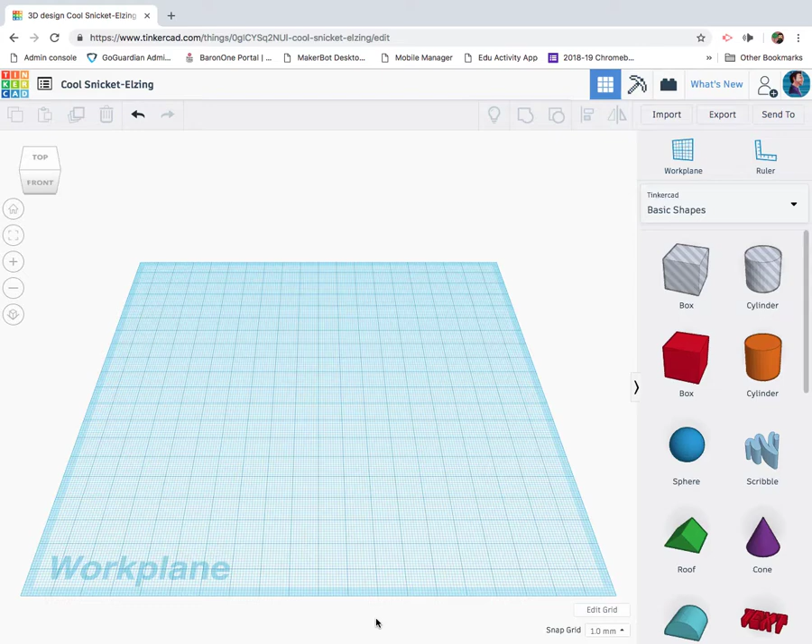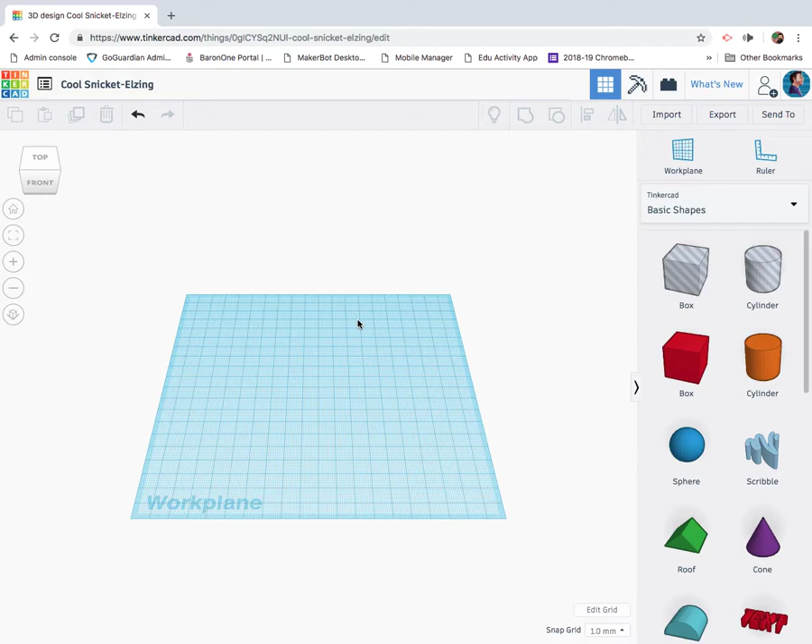Okay, so I have this issue where I have this beautiful window that gets lovely light, but my windowsill is only 3 inches wide. And I have this flower pot with a lovely aloe plant in it that I am trying to find a home for. But the top of the flower pot is about 4 inches in diameter, and it's just not working because I can't balance that pot well enough on my window ledge. Especially as the aloe gets bigger, it's going to have issues. So we're going to 3D print a solution here.

So first off, since I'm talking in inches, I'm going to switch my grid from millimeters to inches so we can all be speaking the same language here.

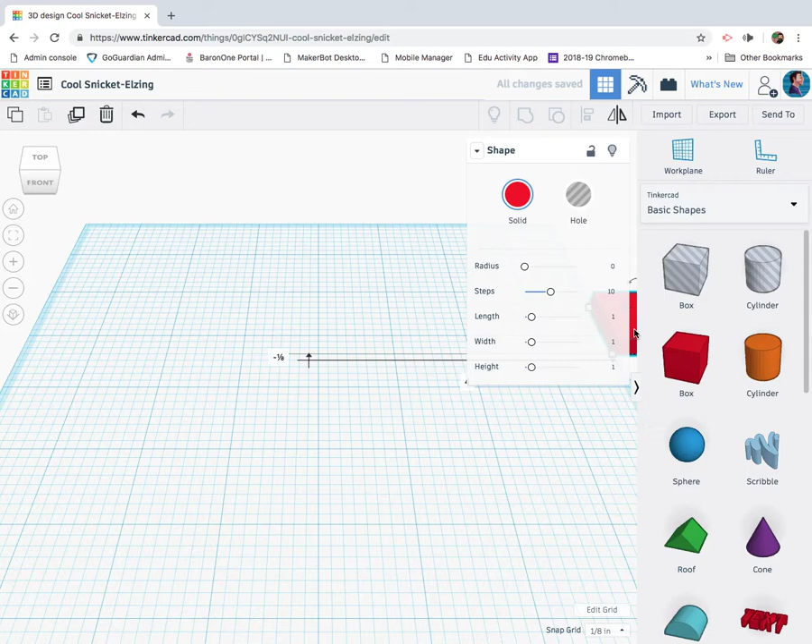Next thing I want to do is grab a box, and I'm going to make this box a quarter inch tall. The box needs to be 4 inches wide. And we're going to say it needs to be... how about we make it 5 inches long? Now, the next thing we need to do is create an actual flower pot for our plant to go in.

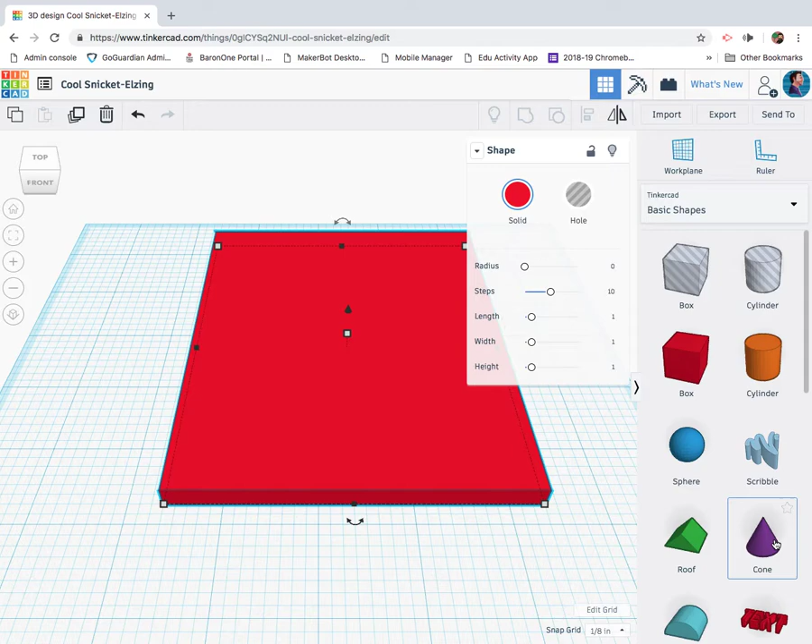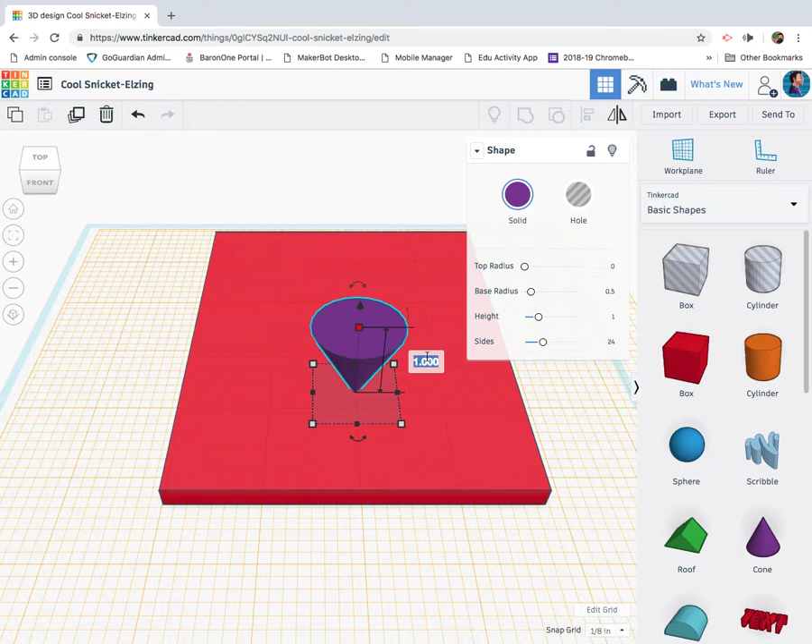So I'm going to grab this cone. Actually, I'm going to take my work plane, put it on top here. Take this cone, put it here. And then I'm going to flip my cone 180 degrees. Next, I don't want it to be 1 inch tall. I want this thing, let's say 10 inches tall. And I want the base of my cone to be 4 inches by 4 inches.

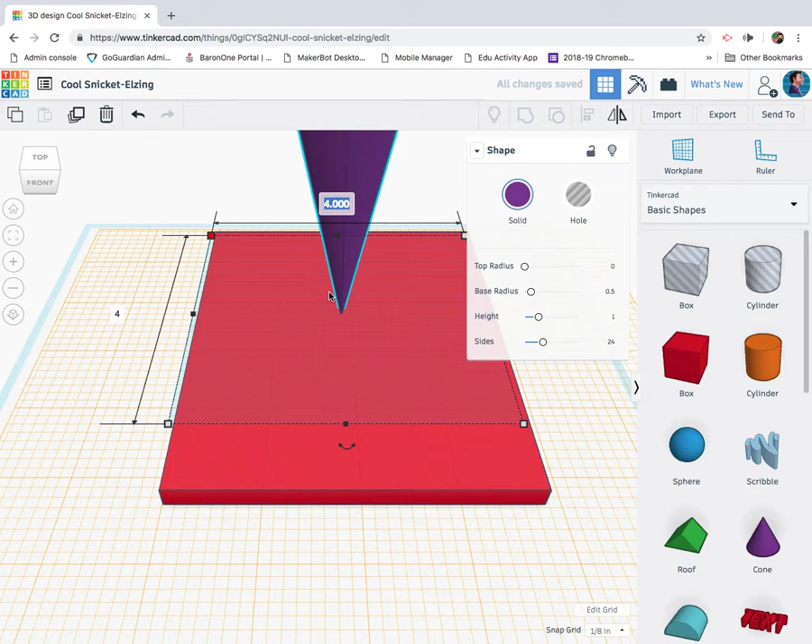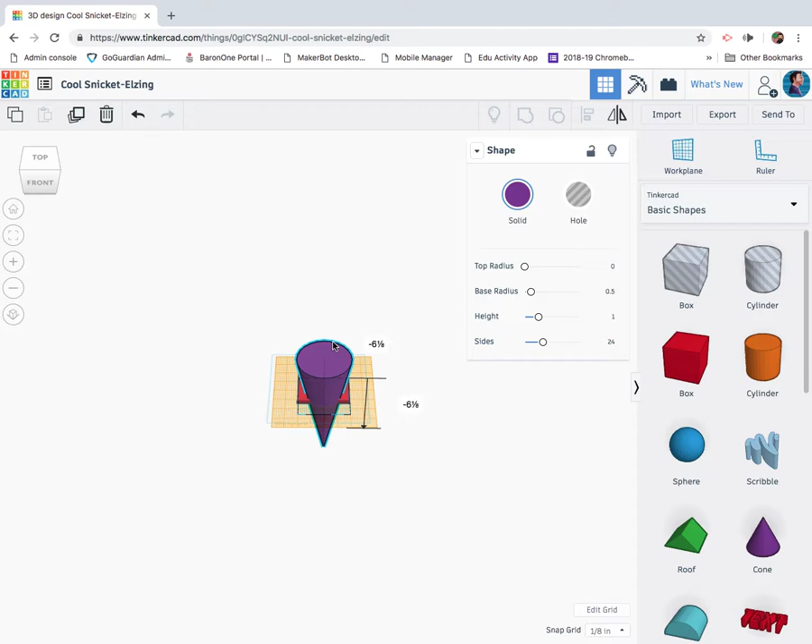Alright, now we got to zoom out because this is way too big. I don't want to adjust the height just yet. Now we're going to put that right there near the front. And I'm going to take this cone here, and we're just going to sink it right into that piece. That's starting to look pretty nice. Alright, so that's sunk in.

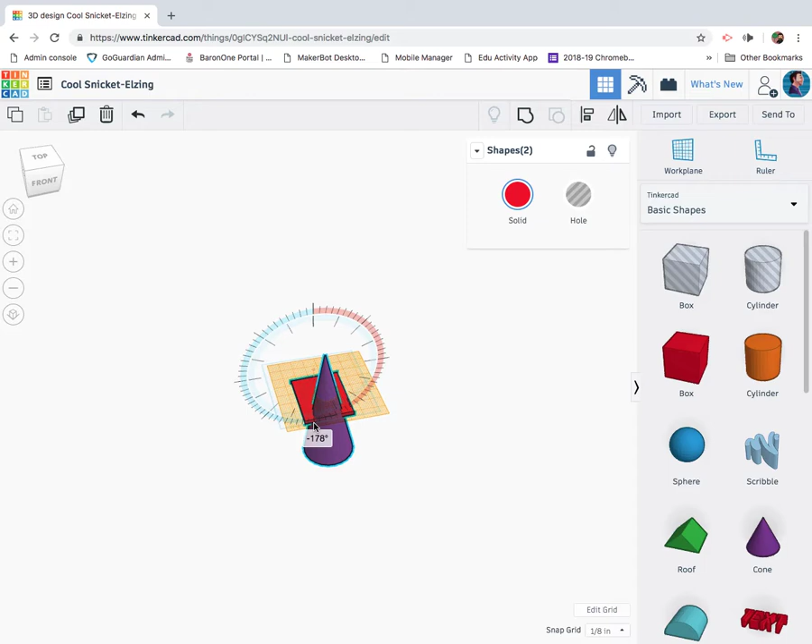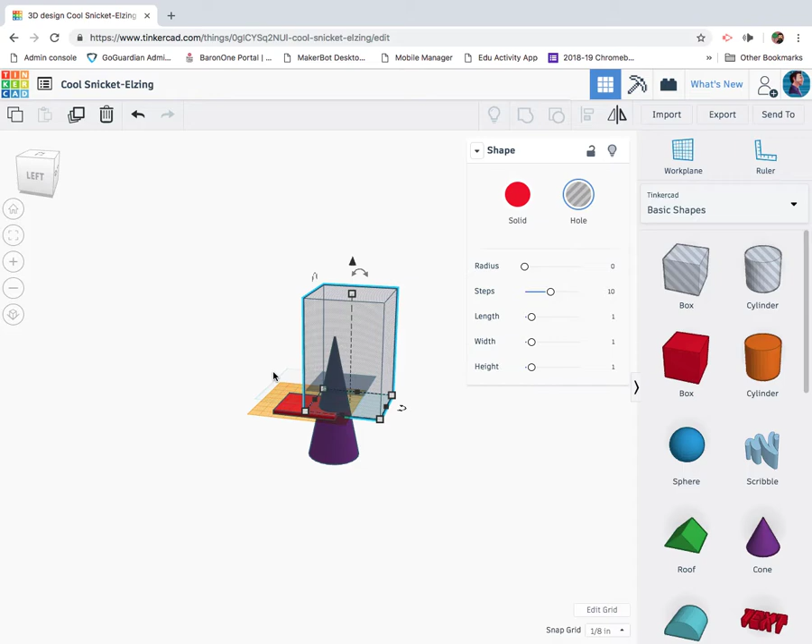Next thing I want to do is rotate the entire piece 180 degrees. So I'm going to take my work plane and put it back on top of that red piece. Now I'm going to take my box, drop it on, make it big. See how the box is completely around the cone? Now I can highlight the cone, the red piece, and the box, group it all together, and I've cut that apart.

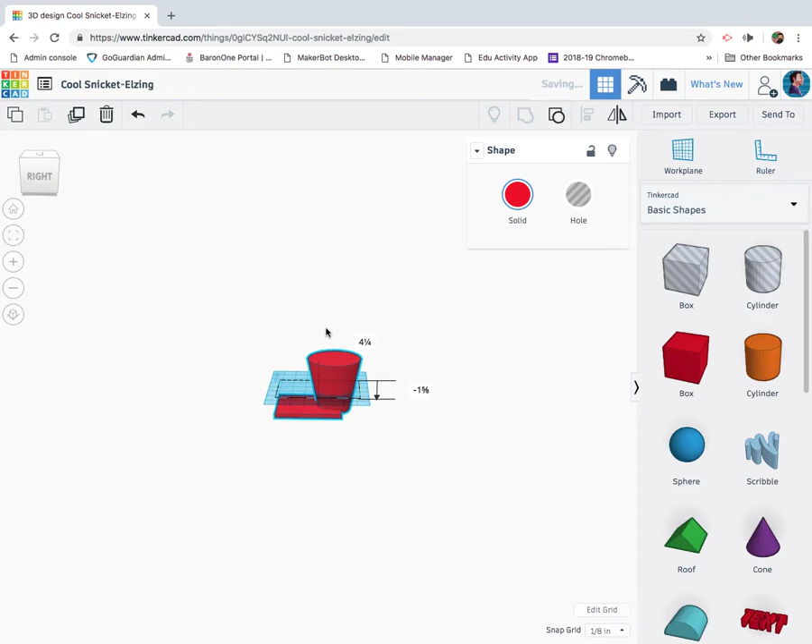Next step is to just throw the work plane back where it belongs, rotate that back around, and then move that back on the work plane. Now I can hit the home button. Alright, this is what I'm looking at right now. So I have this cone on a platform. Alright, so that's all looking good. I'm going to ungroup it.

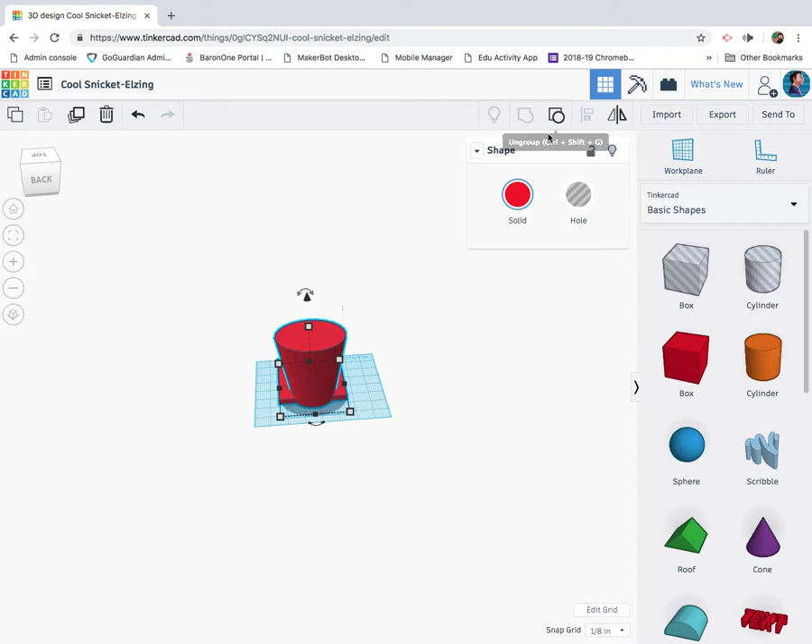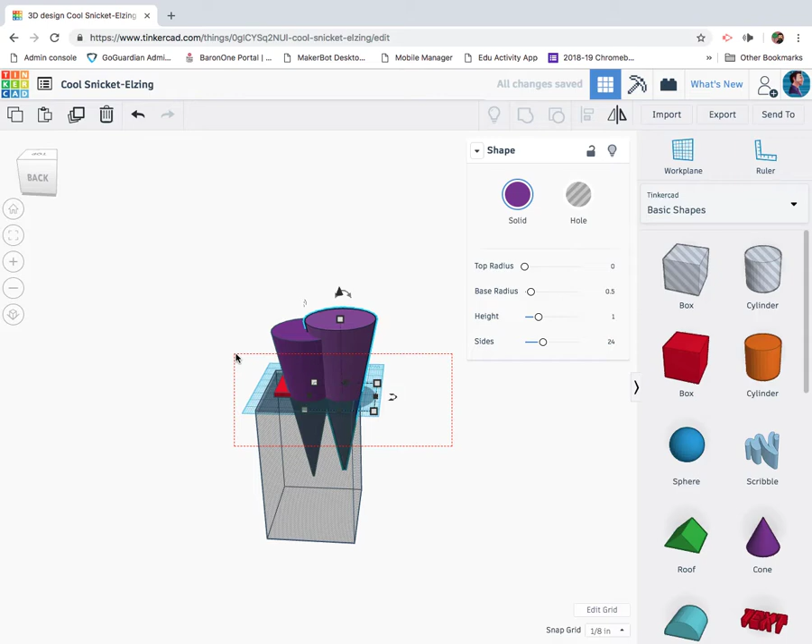There's a few things I want to take care of real quick. Select only the cone, Control C, Control V, now I have two. We're going to offset this by hitting Command, raise it up a little bit. Align, center, so everything's centered. Now I'm going to raise this up a little bit more, and I'm going to increase our sides. Let me do it on this too. This gives it more of a rounded, nice appearance.

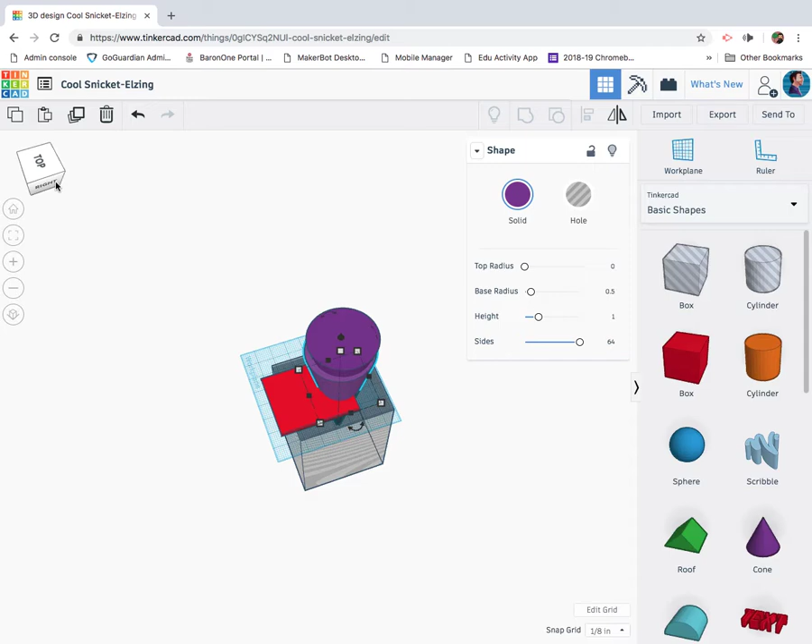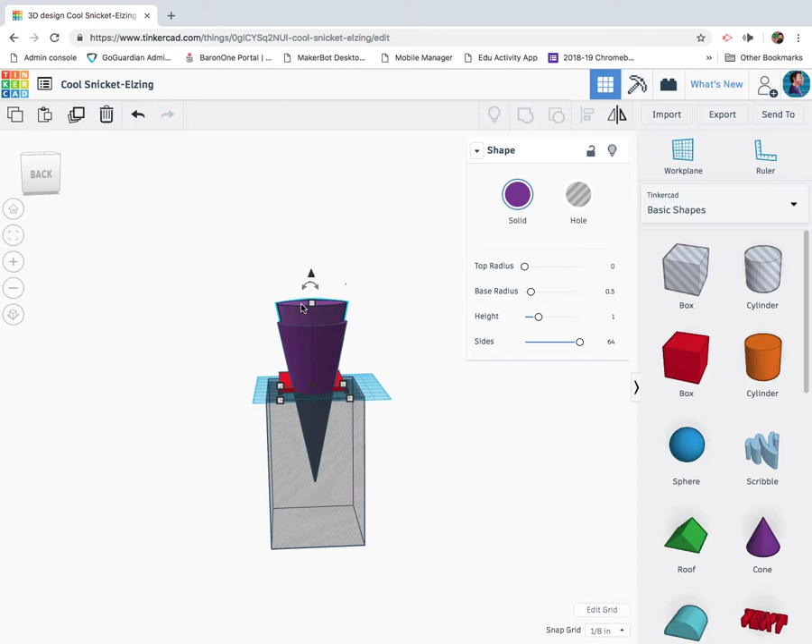Now I want to take this cone, hold down Shift, take this cone, align, center it there, center like that. Alright, so see how it's now centered all around every side. I'm going to drop this a couple more inches there, or quarters of an inch.

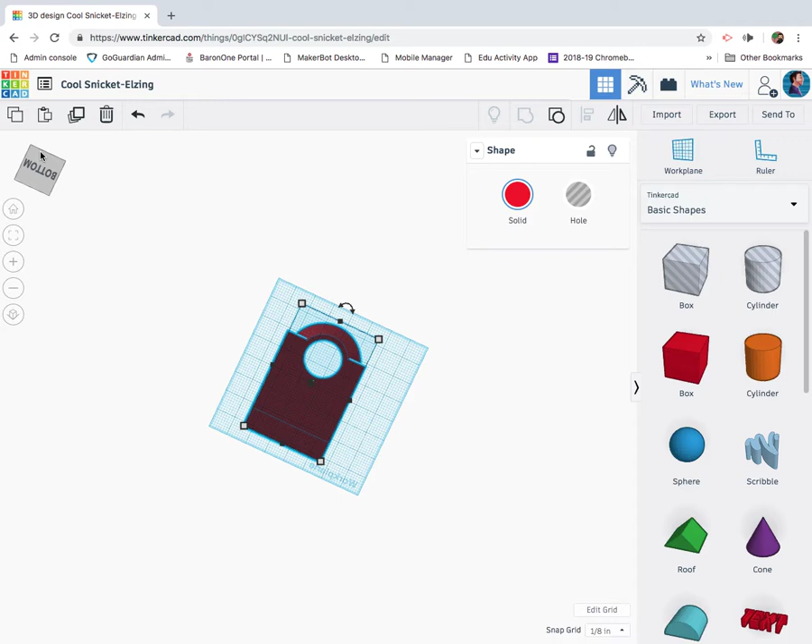Now I'm going to click on that, make that a hole, highlight the whole thing, and group. Alright, so I obviously did something wrong here because I cut my hole all the way through the bottom, and that's not going to be good as far as a flower pot is concerned, is it? So I'm going to undo that group. Alright, so now I've moved my piece over on the side, right?

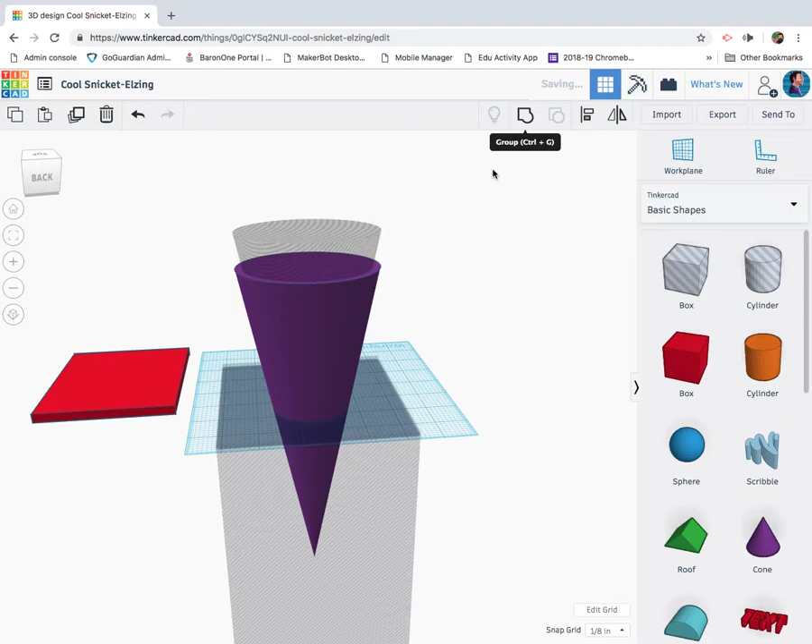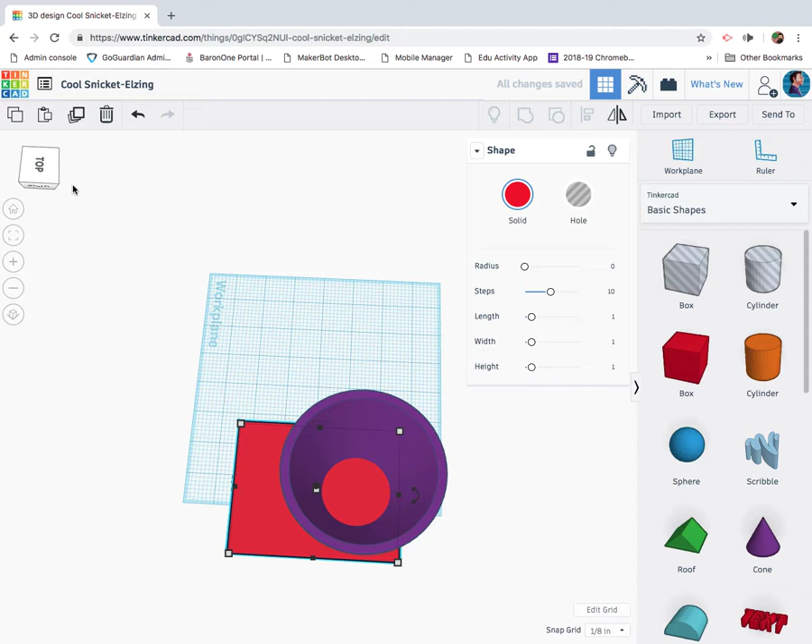I'm going to make this a hole as well and group these three pieces together. Now I'm going to highlight these, align, center, and I'm going to slowly just inch this forward so it wraps the entire piece, and hopefully, alright. Now I can also pull it back a little bit to there.

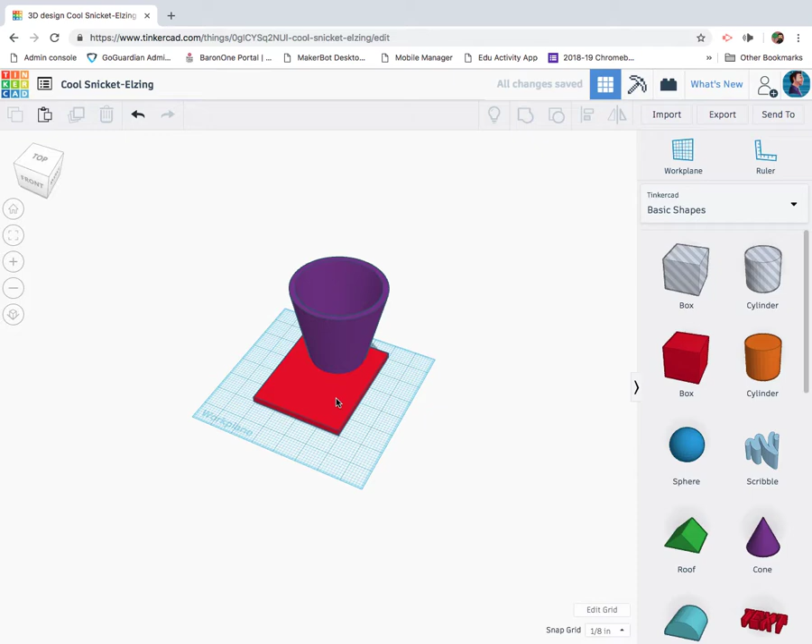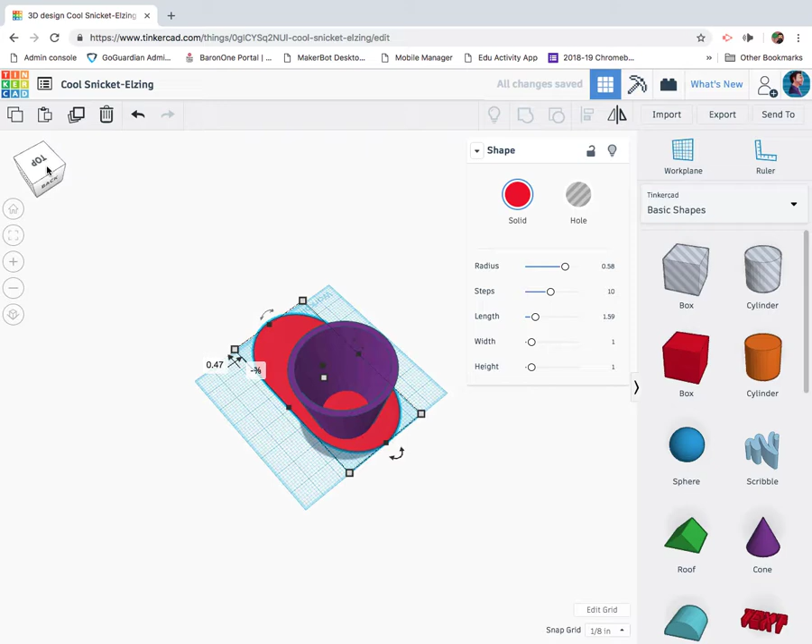Now we've got that under control. So we have the hole covered at the bottom, that in the front. And you know what? Let's take this shape here and increase the radius a little bit, because that'll look kind of nice if we make that more rounded. And then let's make it a little longer. So you can kind of get a feel for everything. I'll move that to the front, but I actually want to move that all the way to the front like that.

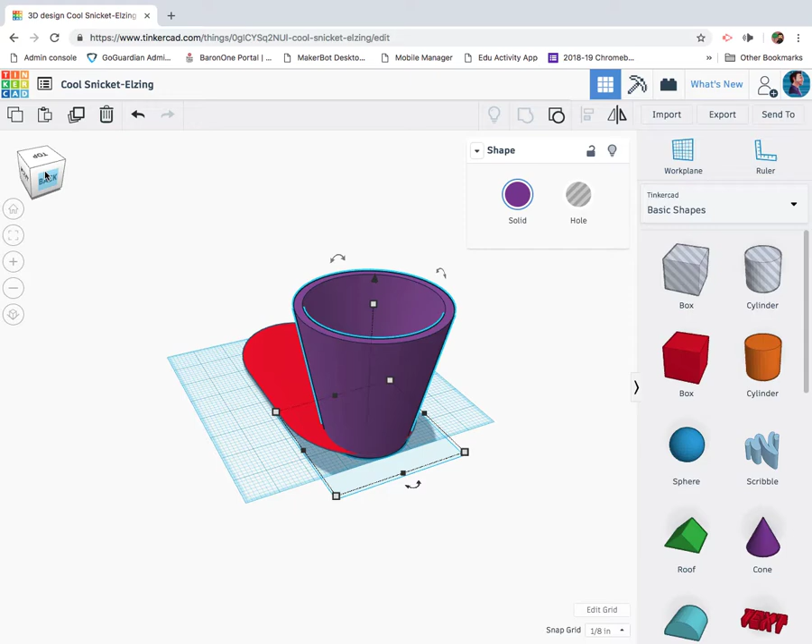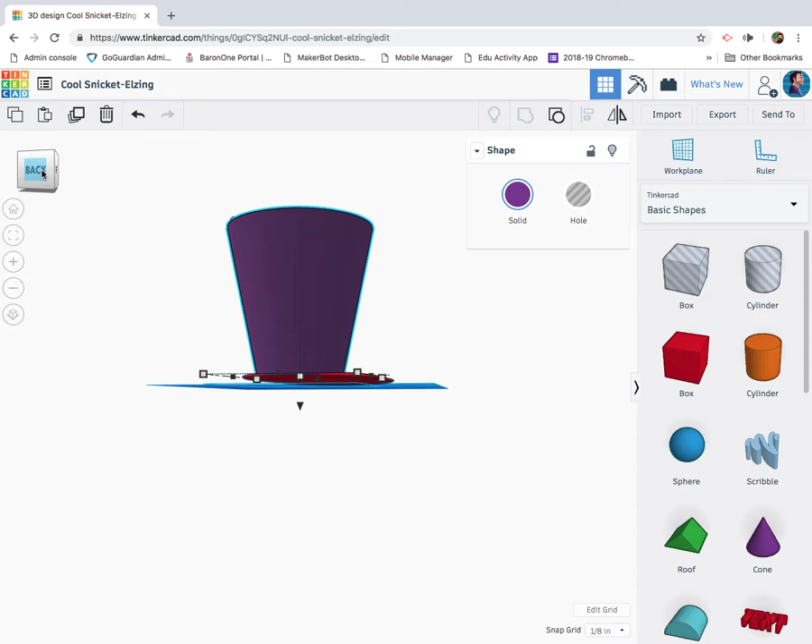Good. It's looking pretty, now look at that. When we increase the radius, that kind of came through the bottom, so we're going to move that up a bit. And I'm going to raise that up to half an inch because I want to make sure it's thick enough to hold the weight we're giving it.

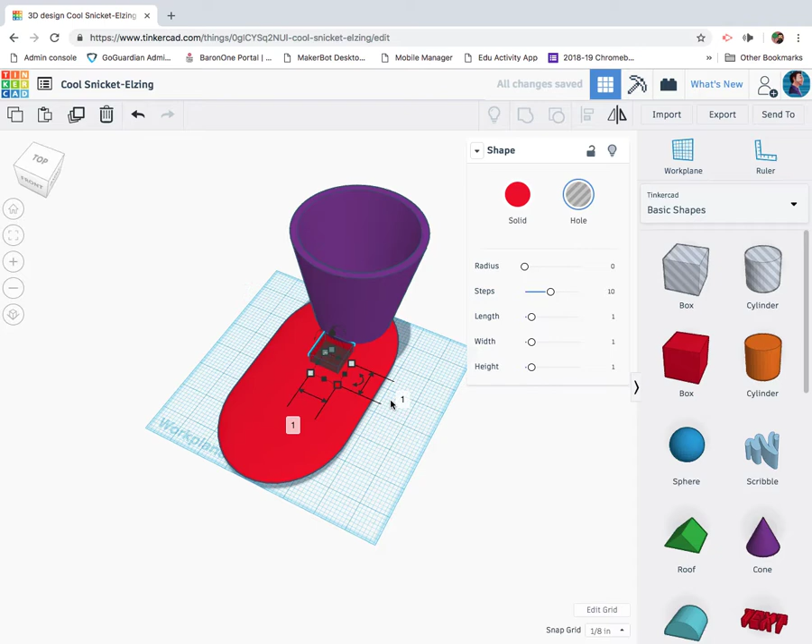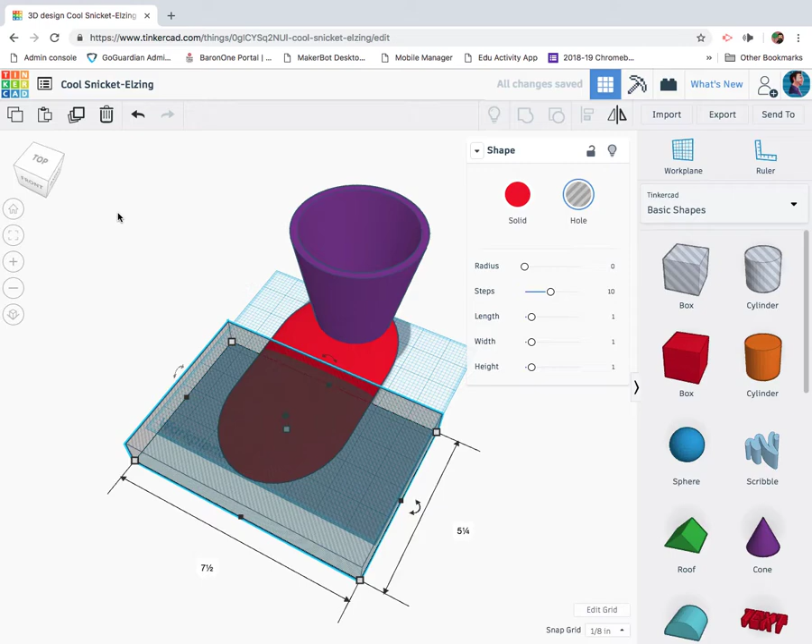And then this, we're going to just change this real quick to 3 inches by 3 inches because that's how big my ledge is. So we're going to cut about that much off of it. No need to make this bigger than I have to. Highlight the whole thing, group it.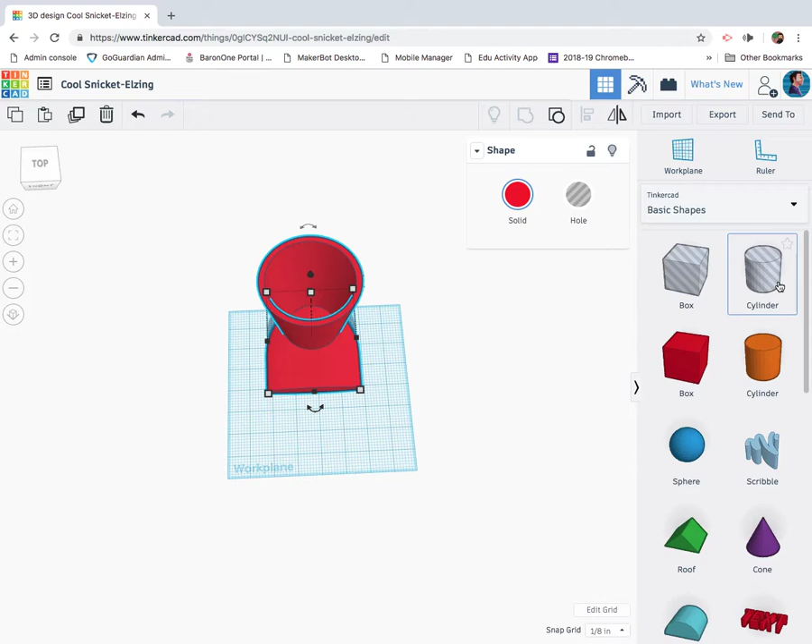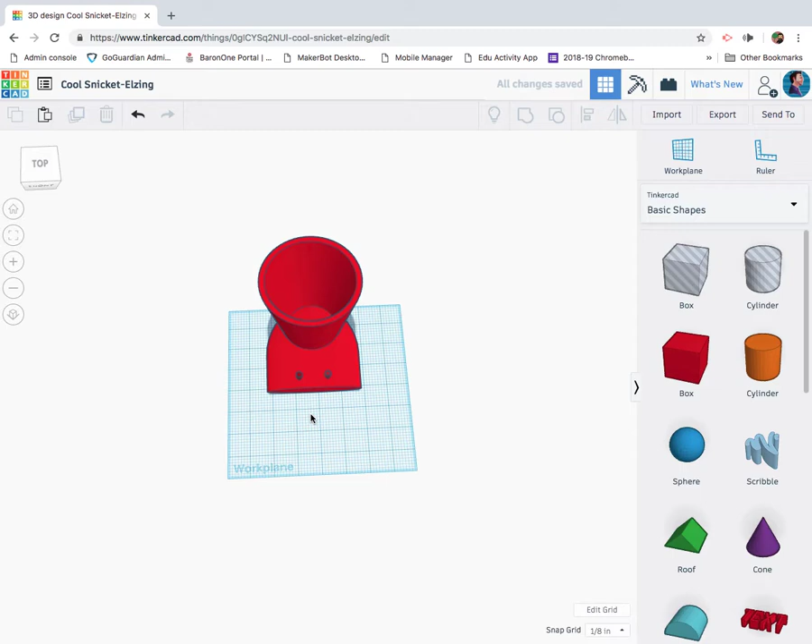And then the last trick to make this thing work is we're going to take a cylinder and change the cylinder to 0.2 inches by 0.2 inches. Put it here. Actually, we're going to highlight, align, put it in the center. And then we're going to Control C, Control V. I have 2, 1, 2, 3, 4, 1, 2, 3, 4, 5. Alright, and now what those two holes will represent are guide holes for screws so I can screw this flower pot into my windowsill.